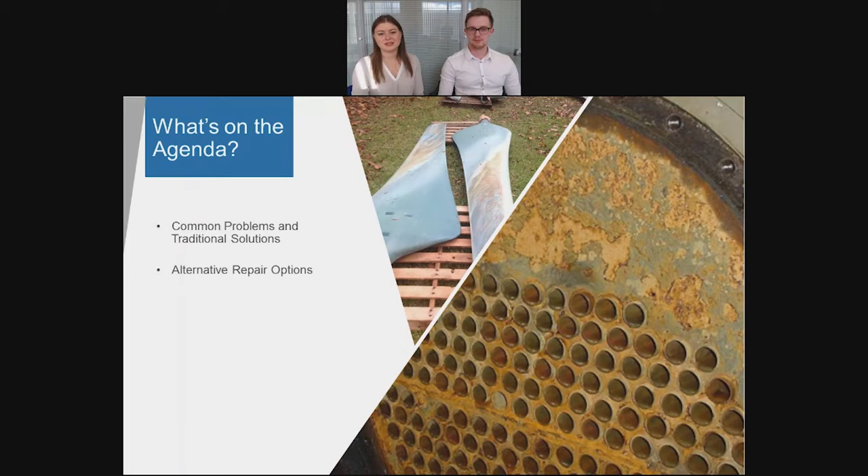And today we are going to talk to you about HVAC maintenance. So we'll start by looking at the problems that industrial and commercial HVAC units face, review alternative repair options, look at methods of how these solutions can be applied, and see some case studies. And you're also welcome to type your questions throughout the webinar, and we will answer them all at the end.

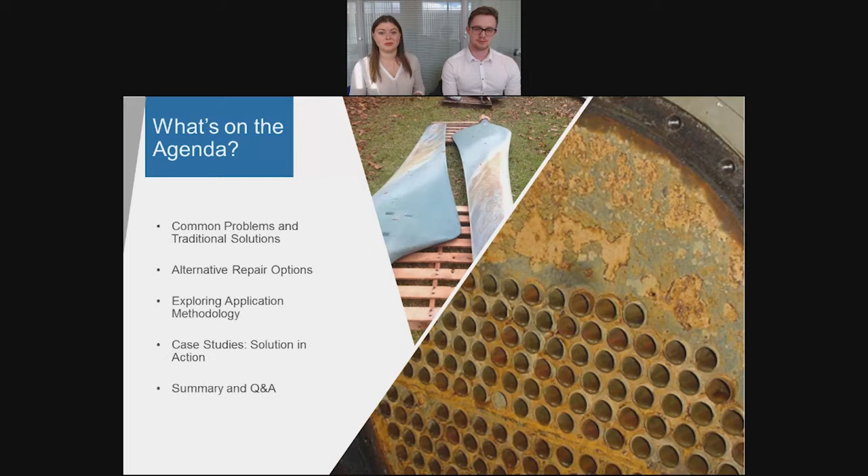So you might be thinking, why is HVAC, or heating, ventilation and air conditioning, such a hot topic currently? As we know, whether it's a commercial or an industrial facility, HVAC systems need to be in operation almost 24/7. Industrial systems use it to change the temperature of certain fluids or gases in order to keep the process going, and commercial units use it to keep a building's occupants either cold or warm. So therefore, it's really important to make sure that these units are in working order.

Disruption shouldn't really be prolonged, as it can normally increase your costs and prevent work from being completed in the first place. So even if an industrial site doesn't have something big like a heat exchanger, there's usually an aircon system or a heating system or something like that involved. More so for the commercial side of things, these units are often out the way. So they'll be up on a roof, in a spare room, somewhere off to the side where they usually get forgotten about. And it's not until the day that they stop working that you remember that you need to have good maintenance routines to make sure that they're up and running all the time.

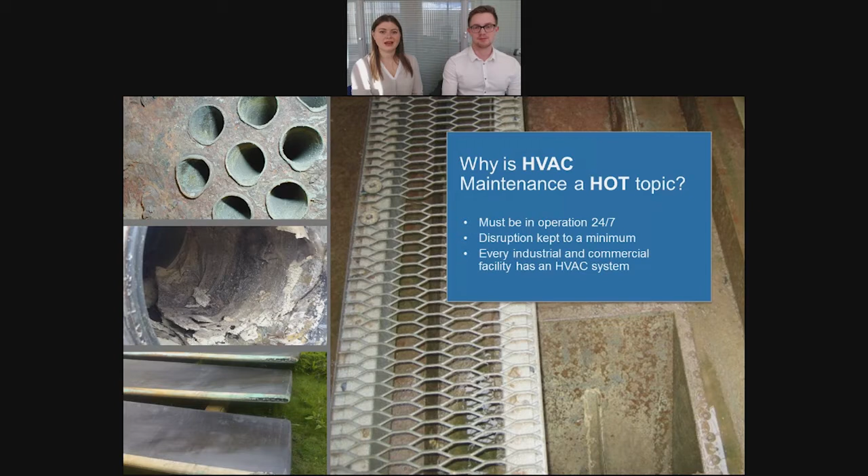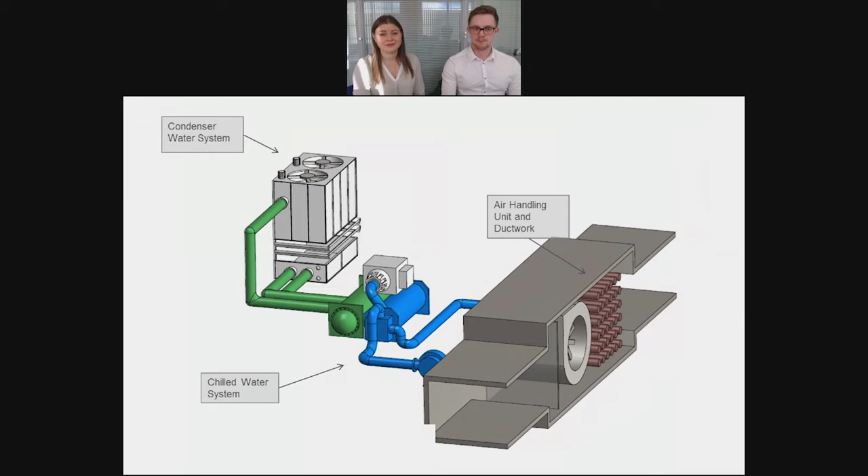So let's look at some problem areas within an HVAC unit. So first we will look at condenser water systems, then chilled water systems, and finally review problem areas within air handling units and ductwork. HVAC is an almost entirely closed loop process, so the whole system needs to be functioning in order for any output to be achieved. The main thing that's really stopping this output from happening in a lot of cases is corrosion. As we all know, corrosion is a massive battle for anybody who owns any type of equipment. And building owners, managers, integrity engineers tend to struggle to maintain the integrity of units such as HVAC.

So to get a corrosion cell, we only need three things. You need an anode, a cathode, and an electrolyte. But unfortunately, in this type of situation, all of these are present within an HVAC system. So to take an example, you can see an example of a tube sheet heat exchanger on your slide at the moment. And they're a classic example of where you get this type of damage. Large surface area of metal in contact with a large volume of liquid makes them susceptible to corrosion. Not only the standard general corrosion, but also bimetallic or galvanic corrosion as well. So if it's not properly treated, effectively the metals gradually self-destruct when they're exposed to these circumstances.

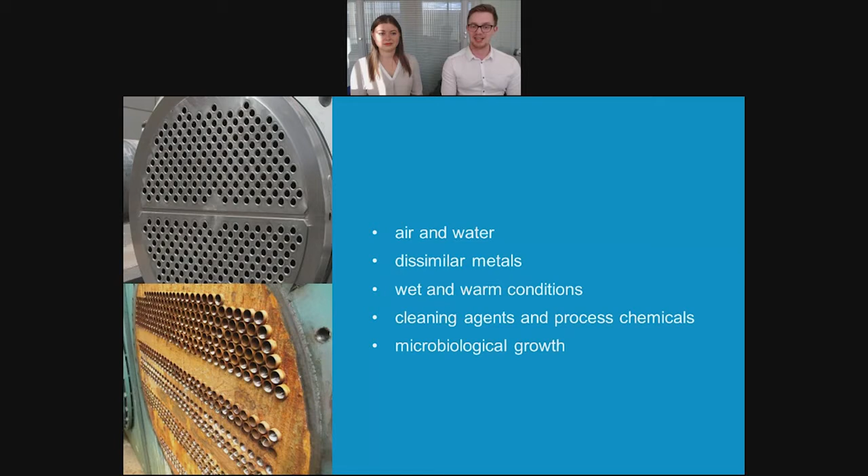Usually in a tube sheet heat exchanger, the tubes are made from copper while the face is made from something like mild steel. And because copper is a more noble material, the steel begins to corrode preferentially, causing a really rapid loss of material. This becomes a problem the longer it goes on. If it's left completely unchecked, the wet and warm conditions inside the HVAC system, combined with any cleaning agents and process chemicals, accelerate the corrosion massively.

So some of the standard solutions you might come across: in a lot of cases, replacement is normally the first port of call. Obviously, this brings you back to your starting point with a brand new bit of equipment. However, it doesn't necessarily last. So you need to ask yourself, have we found and fixed the root cause of this issue? If the answer is going to be no, then you can probably expect history to repeat itself.

Patch repairs and weld overlay are, to put it simply, adding just more metal to the surface, and with these you can encounter a few issues. Either you're not fixing the issue permanently, it could happen again in some cases, or over time you'll need to complete multiple repairs to the same piece of equipment. So it makes sense to choose something which would prevent it from happening again across the entire piece of equipment. You could perhaps choose to use a certain type of paint or sacrificial anodes or something similar, but these either have a limited service life or require constant replacement and maintenance in order for them to be effective in the first place.

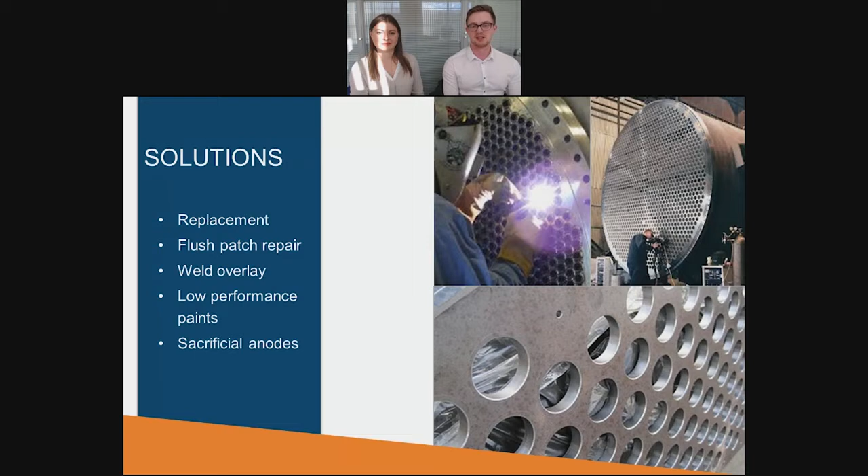So we'll look at the condenser water systems now. Large office buildings, hospitals and schools typically use one or more cooling towers. And unlike the large concrete units we see at power stations, these smaller cooling towers are commonly constructed from galvanized steel. And the combination of air, water, chemicals, and heat in cooling towers creates a severe corrosive environment. And we usually see perforations and severe metal loss on units which have been in service for some time.

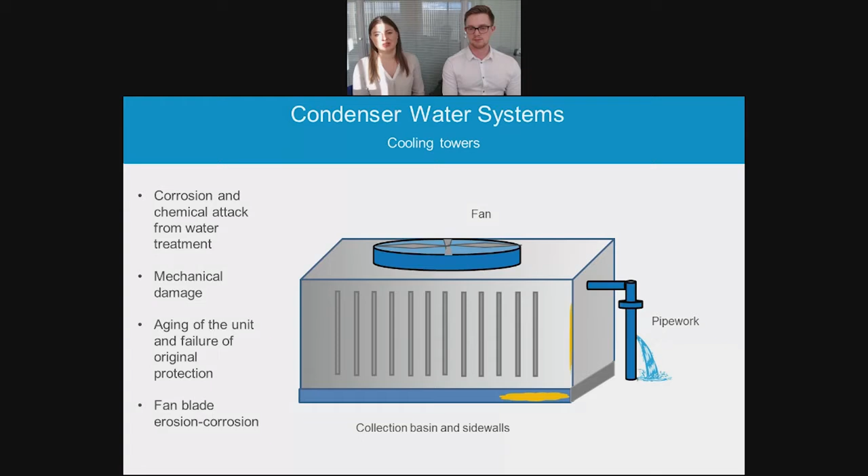So let's look at some of the solutions that we can recommend for these types of problems. So our first case study brings us to a local bank where we are looking at 3 Marley cooling tower cold wells. And this type of system is usually protected by galvanization of the steel. However, the chemicals which were being used to treat the water were so strong, they actually ate away the galvanized

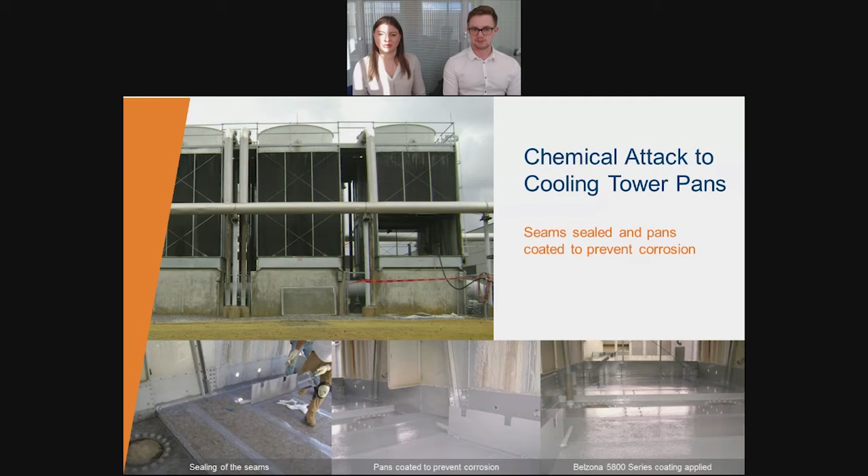sections of the steel. And the exposed area, which was the pans at the base of the unit, which we can clearly see in the pictures here, began to corrode, and they were concerned that a leak would develop. So the decision was made to coat the area and seal the gaps around them. And materials used for this job have excellent adhesion and do not corrode, so non-metallic materials that Belzona offers. So problem solved.

So the next example we're going to look at is an example of a part of the HVAC system which again is forgotten about, but is part of all of them. So pipework. We focused a bit on the towers and the big units so far, but obviously something needs to transport all this water and all this liquid around the system. So as you can see from the picture, the geometry of this leaking pipe made it very, very difficult for them to come up with an effective repair. The engineers who were tasked with making a repair were actually really struggling to find something which was suitable to

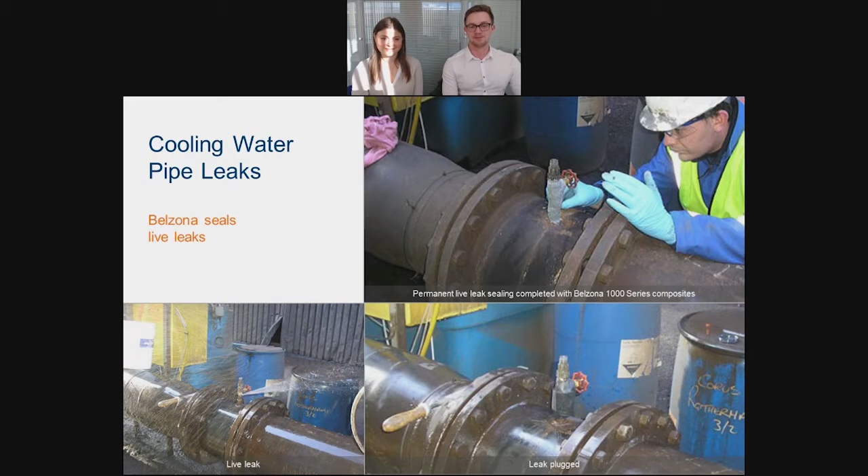In the rest of the system as well, so obviously we have the pipes, we have the bigger units, but the air that's been exhausted out of the system has to go somewhere. So normally you'll find fan blades within the system. On first glance, a fan rotating and forcing air out of the system doesn't seem like it would have that much damage done to it. However, much like their bigger turbine counterparts, the small amounts of moisture in the air can cause really severe erosion to the leading edge of the blades. The blades themselves are designed to a very, very tight specification, so any deviation in this design causes issues such as efficiency loss.

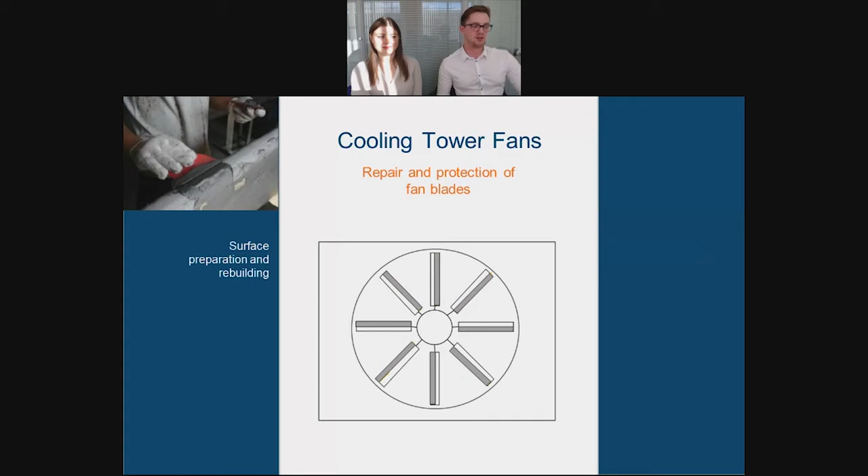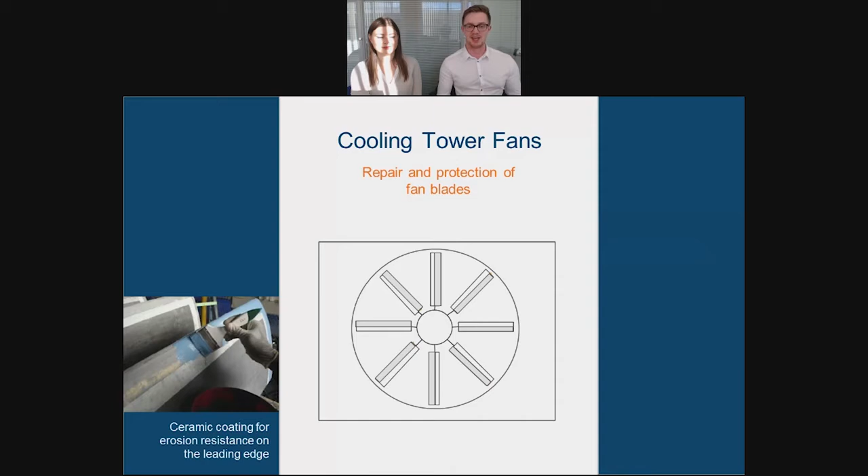The repair method itself is relatively straightforward. So begin with surface preparation and rebuilding using a paste grade. You can then apply a ceramic coating onto the leading edge to prevent that erosive damage from the moisture contained in the air, and then apply a general polymeric coating for protection from corrosion and also chemical attack to the remainder of the blades.

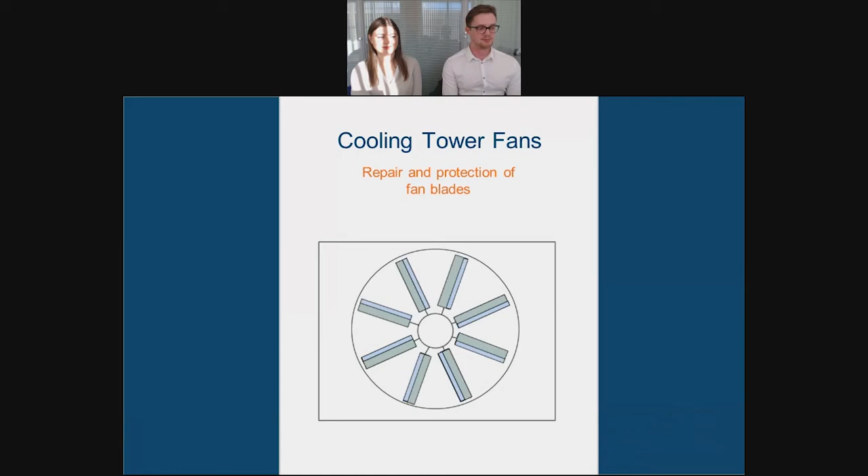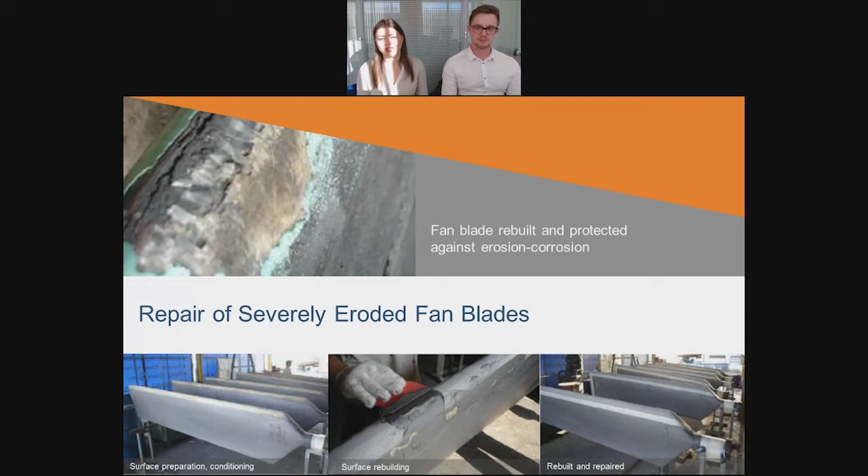So you can see here a clear picture of exactly what happens when this erosion corrosion issue goes unnoticed for a very long time. So we see severe erosion on the FRP fan blade, and in terms of repair, after surface preparation and conditioning, the worn edge of the blade has been rebuilt with the ceramic epoxy that Henry talked about before, which adheres very well to FRP. Combined with the reinforcement tape, it will prevent blade disintegration and strengthen its structure. So it's a great alternative to replacement, and jobs like this can even be carried out in situ.

So the reason for this next repair taking place over in Texas was because the system itself was beginning to lose efficiency, mainly due to the erosion of the blades. The customer was finding that they needed to replace the blades every 5 to 7 years, and because they had 12 towers, you can imagine in each of these towers they have a couple of blades. That's going to get very, very costly for them to constantly replace them.

So using 4 different products from Belzona, including 1111 and some of the ceramic coatings, they rebuilt the blades back to their original specification. The customer actually noted after that they'd saved as much as 80% on their replacement costs. This was down to the minimal amount of material and equipment they needed to do the repair, and also the overall cost of buying new blades in was very high in comparison to the repair that they completed.

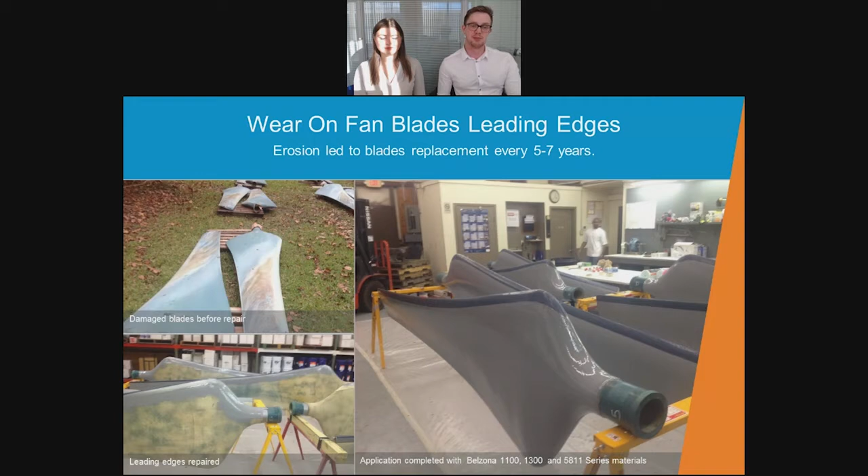So we're going to have a quick look now at the chilled water system section. Chillers and heat exchangers are a vital part of any heating or air conditioning system, and failure can normally be caused by a couple of issues. As we've already mentioned, corrosion leads to wastage and metal loss on the tube sheet face around the coolant tubes, and this can be classed as either general or galvanic corrosion.

And the second one is leakage. This loss of metal, mainly through erosion or corrosion, can cause leakage of this coolant and potentially contamination of the chilled water itself. Again, it drops the efficiency. Normally, a corrosion allowance is designed into the system to accept anticipated levels of metal loss. However, throughout its lifetime, metal losses will gradually occur, and if the corrosion allowance is exceeded and gaps begin to appear, eventually you'll get recirculation, which again drops your efficiency massively.

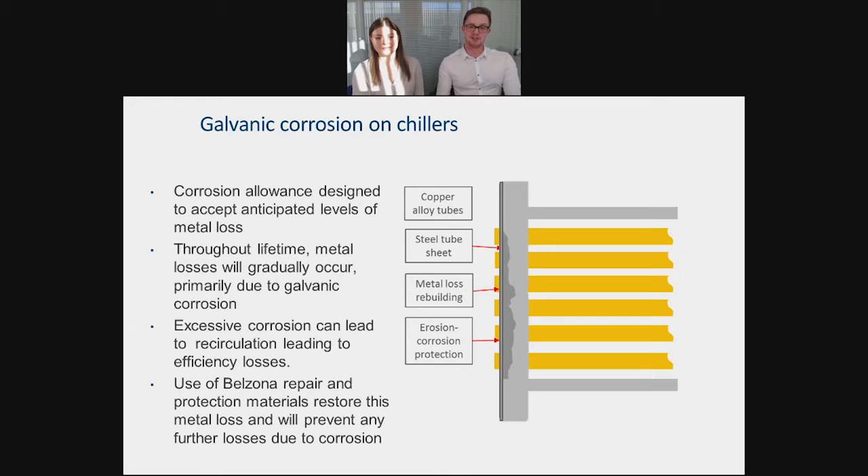So in order to prevent this from happening, there's a way to apply epoxy materials to a tube sheet face in order to stop the corrosion from the start. First, an epoxy paste is used to rebuild any lost metal, and then we use a ceramic-based coating to prevent the damage from reoccurring. If you can prevent that liquid from contacting the surface in the first place, then you can prevent the corrosion from even beginning. So let's look more closely at the process of repairing and protecting tube sheets.

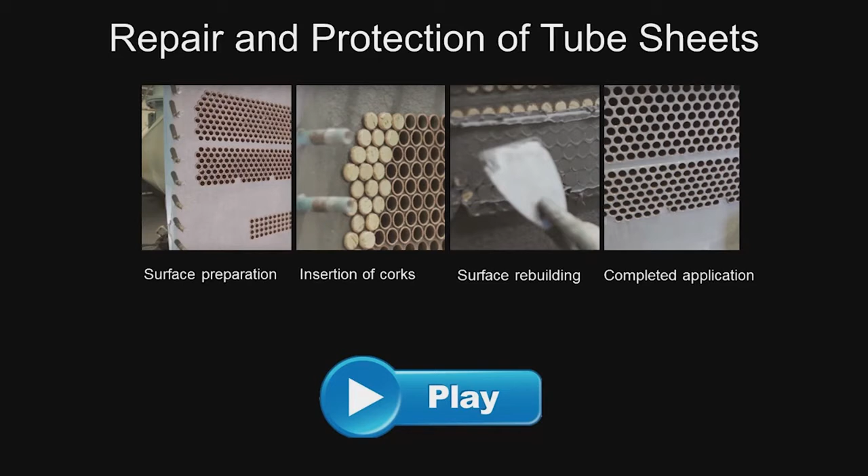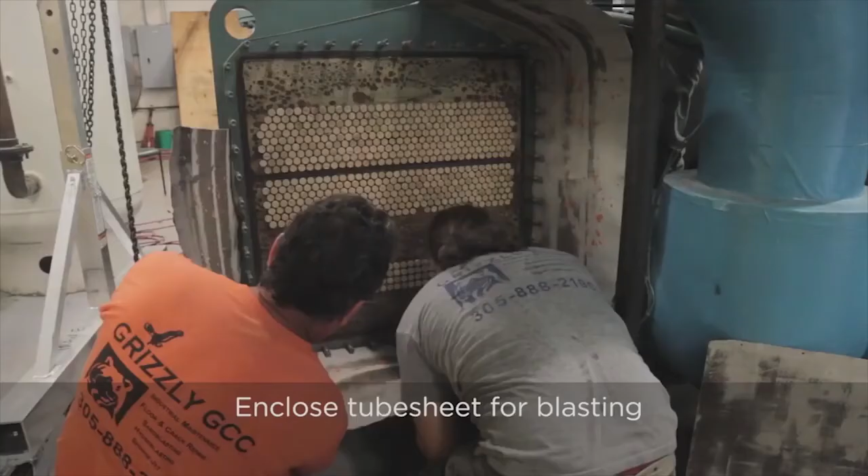Okay, so this is just a quick example of an application we did onto a chiller, a tube sheet application. The first step is always surface preparation. The first thing they're going to do is insert these corks into the tube sheet, and what this does is block up the tubes themselves. The whole reason we do that is because we don't want any of the grit from the grit blasting or any product going down the tubes, because it would block them. And a blocked tube would again reduce the operational efficiency of the system.

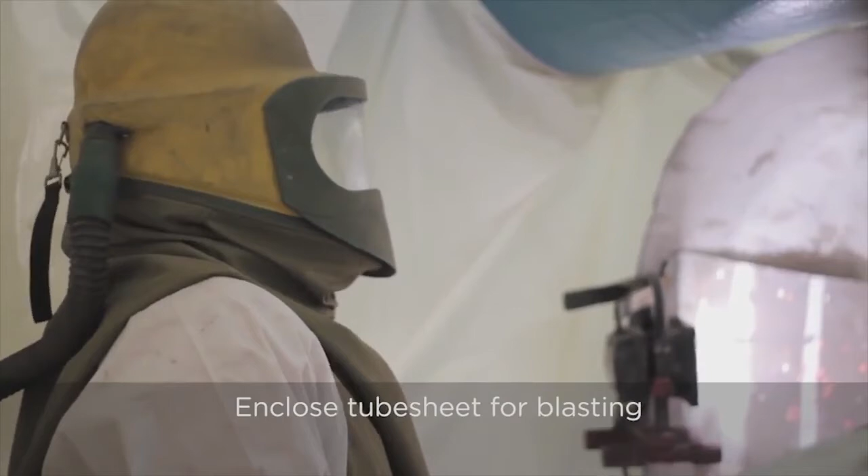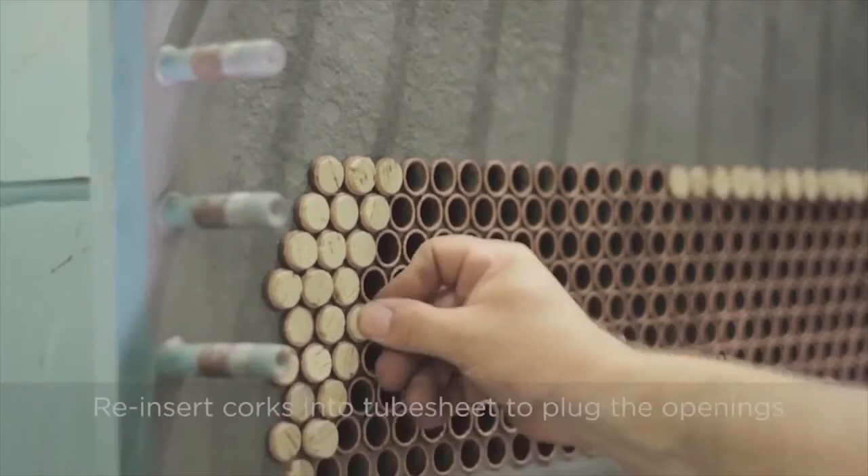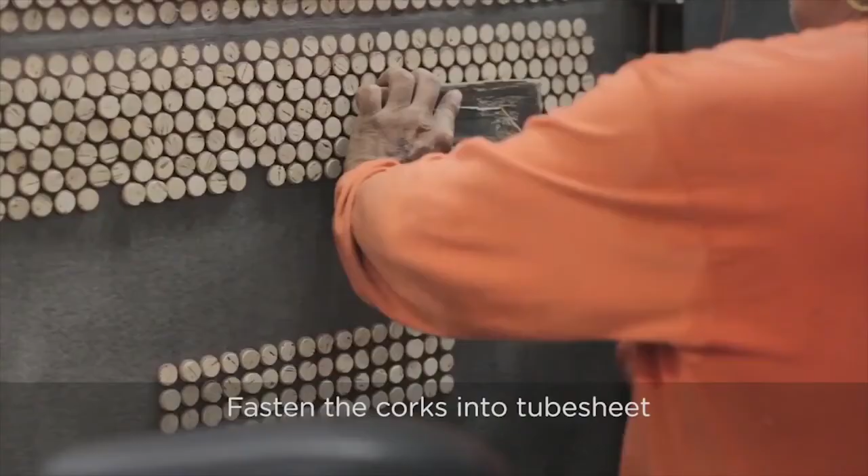So once all your corks are in and everything's enclosed off and ready for blasting, you start with surface preparation. Ideally, grit blasting is the preferred option because it removes all the corrosion, it cleans the surface really well, and we're looking for a 75 micron profile to the surface. Afterwards, remove those corks and replace them, because they would have been slightly damaged from the surface prep process, and refasten the corks back into the tube sheet itself.

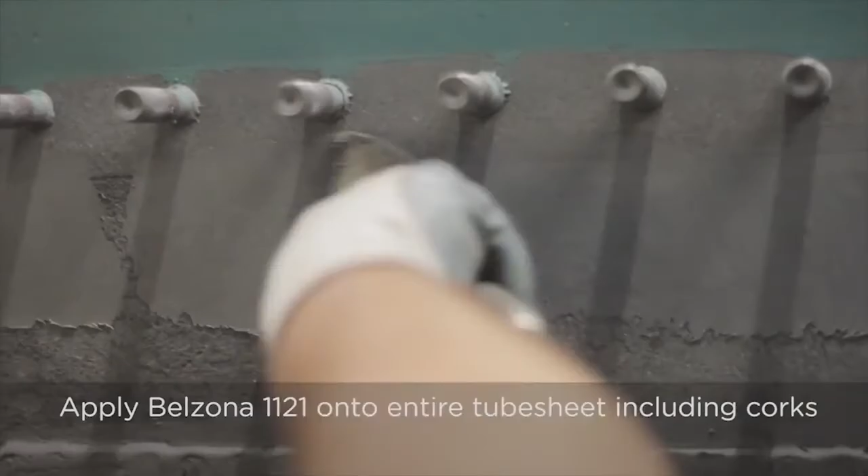In order to get this metal back up to a surface where we can apply a coating, you then mix up the epoxy paste grade, and then he's just going to use a spatula and paste that onto the surface after the surface prep to rebuild it and get a nice flush finish to the application.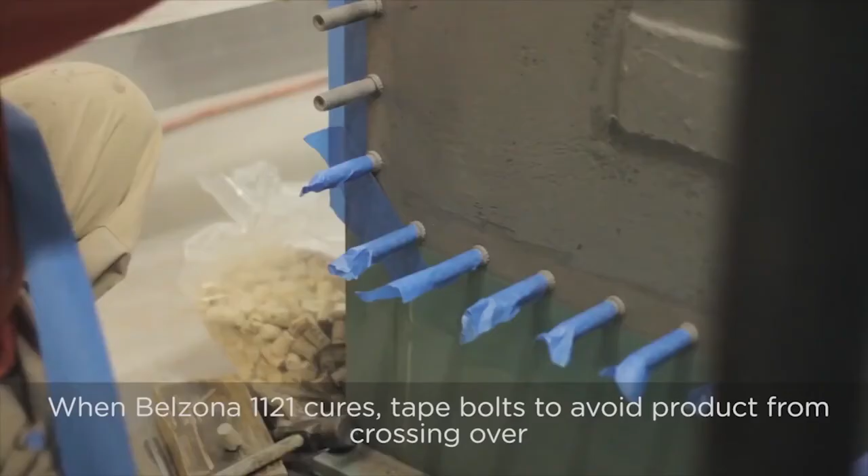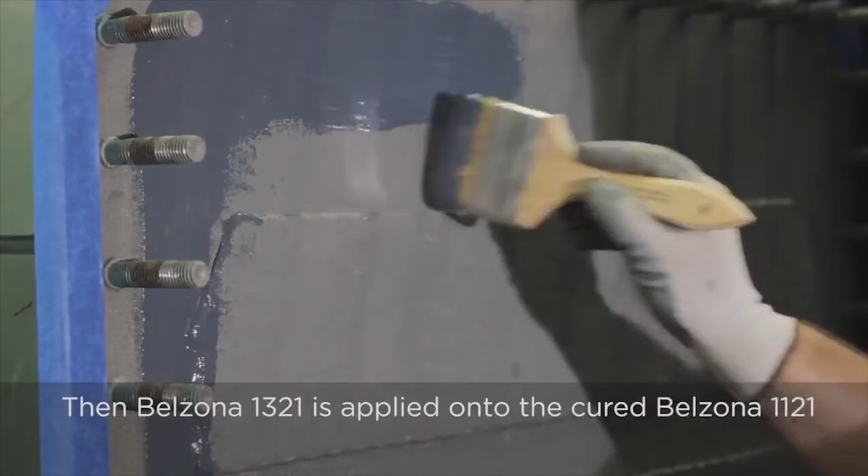After the Belzona paste grade is cured, you then tape all of the corks in order to avoid the product going down the tubes, replace them if necessary, and then you can apply the Belzona 1321 or other ceramic-based coating directly on top of the Belzona paste grade, as long as you're still within that overcoating window. They used Belzona 1121 in this example because it had an extended working life and also an extended overcoating window, which meant they had plenty of time to apply this material on top.

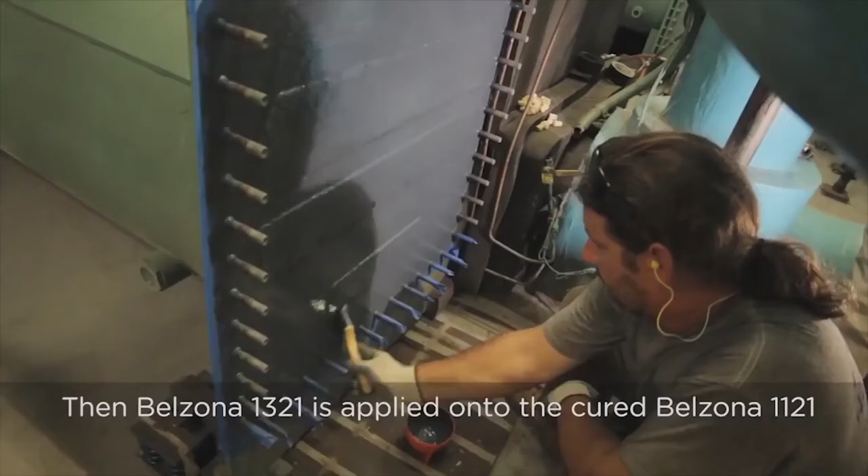Once both of them have cured, you can then remove the corks finally from the system and dress back the coating to give you a nice flush finish where you've prevented the liquid from contacting the surface, and you've also isolated the tubes from the tube sheet face, which means you've prevented any type of corrosion from happening in the future.

Great, thank you, Henry.

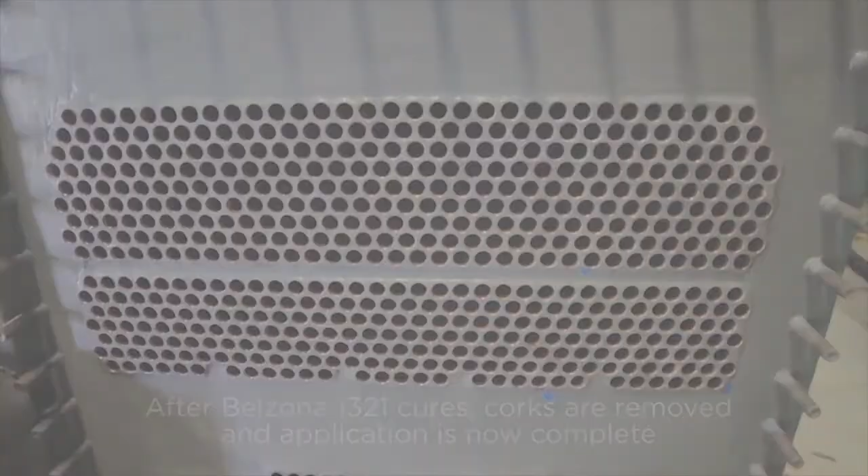We do also tend to get a lot of questions about how you can remove the corks. So in terms of removing the corks, you can do it manually using a corkscrew. It takes a bit of time and it's quite labor intensive, but it is the most accurate way. Or if you can get to the other end of one of the tubes, you can blow compressed air down the tube and it will pop the cork out on the other side. That's the easiest way I've found to remove them myself.

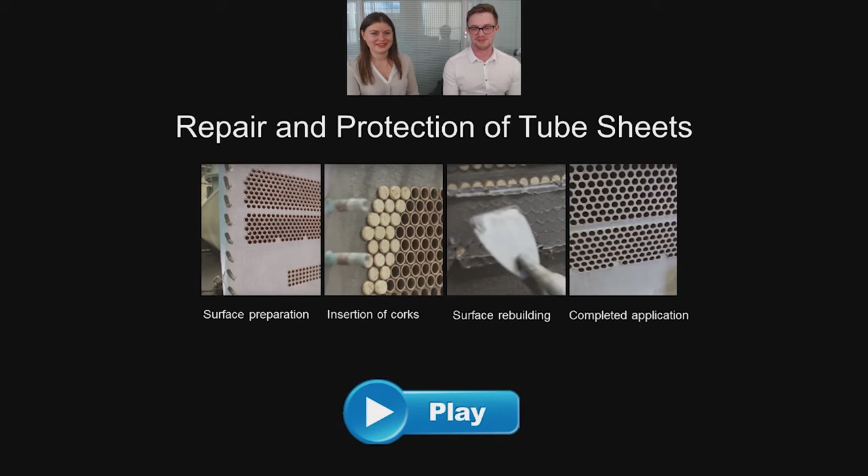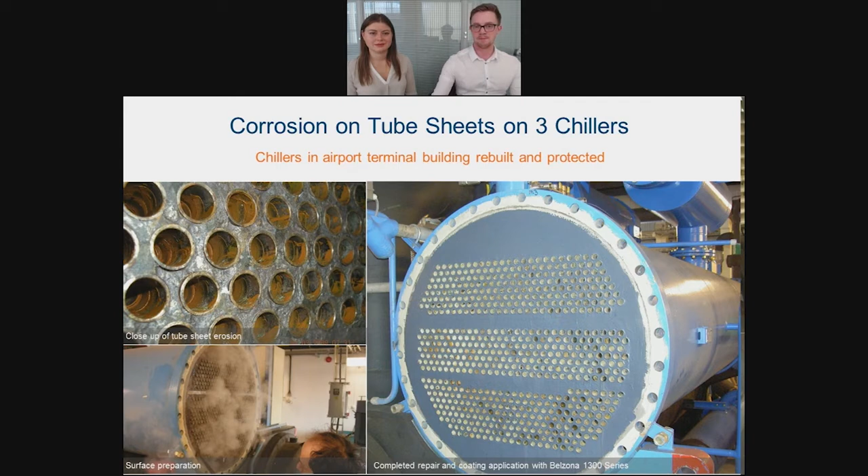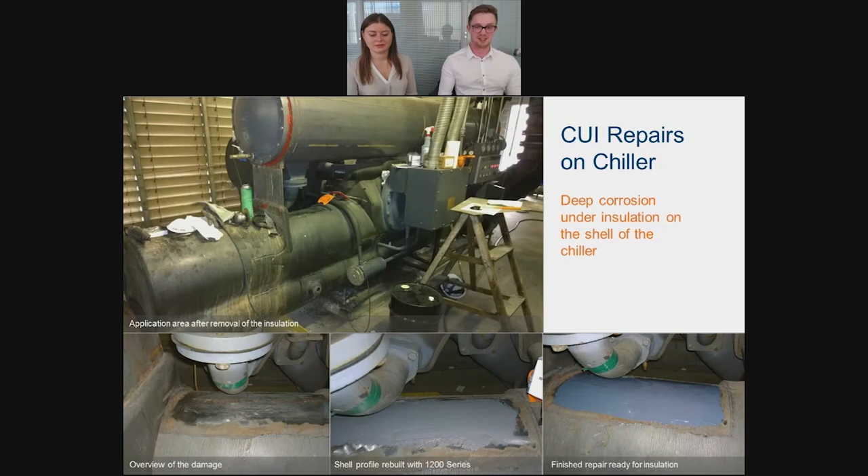So now if we move on to the final section, the air handling system suffers many similar problems as the pipework. Internal corrosion due to water condensation, higher temperatures as this handles a lot of the exhaust air from the HVAC system, aggressive cleaning chemicals contained within the condensate, and even sometimes microbiological growth within the system.

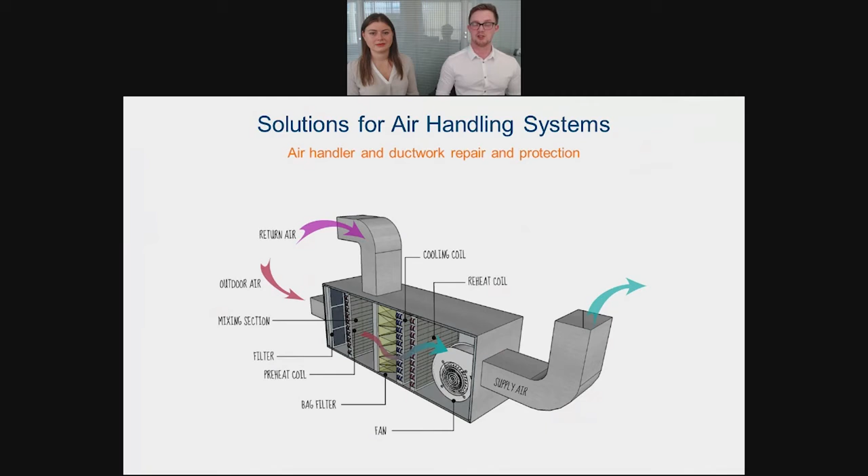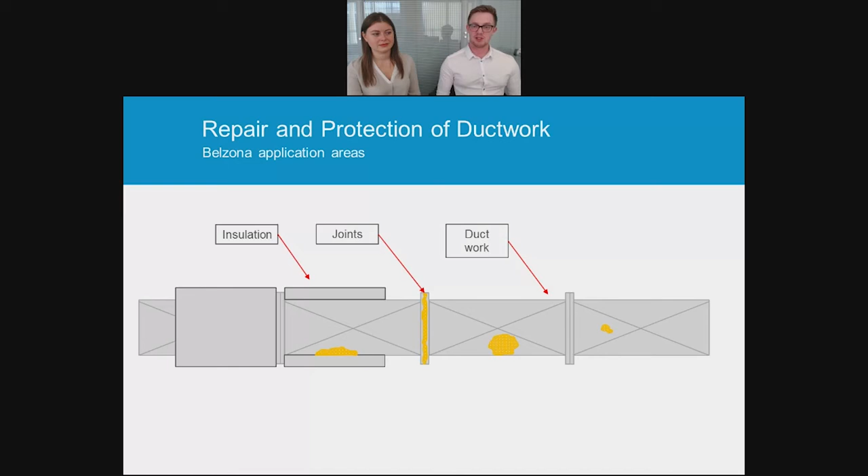The ductwork itself is similar to the pipework for carrying the water, but it's more for the air side of things, and it's the lifeblood of the air-based system. So just like the pipework, problems come with the design. Normally there are a lot of junctions, seams, seals, joints, and other crazy geometries, and this gives more areas susceptible to leaks. The failure of the joints and seams can also allow critical ingress of water and disruption of the airflow, and it affects the cooling and heating process.

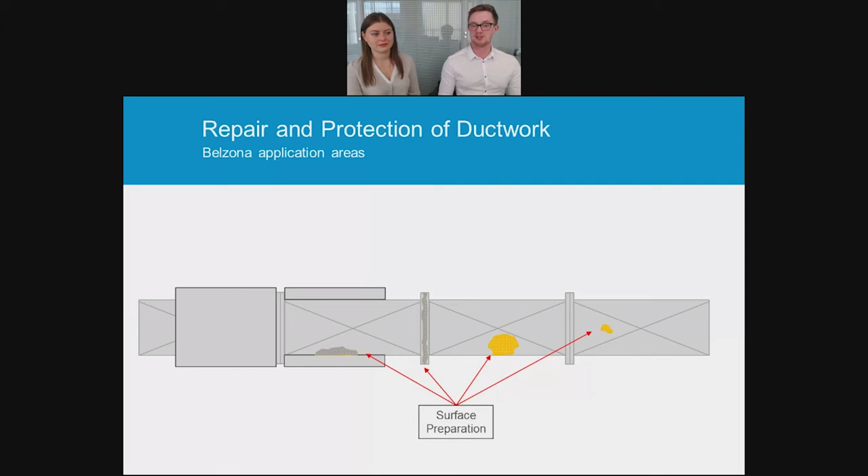Belzona's flexible repair materials can restore these joints and seams as a long-lasting solution. Sealing at the interface where the roof and the ductwork meet can also be achieved with these same Belzona flexible membranes, and the complex contours themselves are quite difficult to coat. So a system which can cope with being applied at various angles is always a positive. Again, these Belzona materials can be used for protecting both the internal and external of the ductwork, as well as T-pieces, elbows, and other difficult to coat areas.

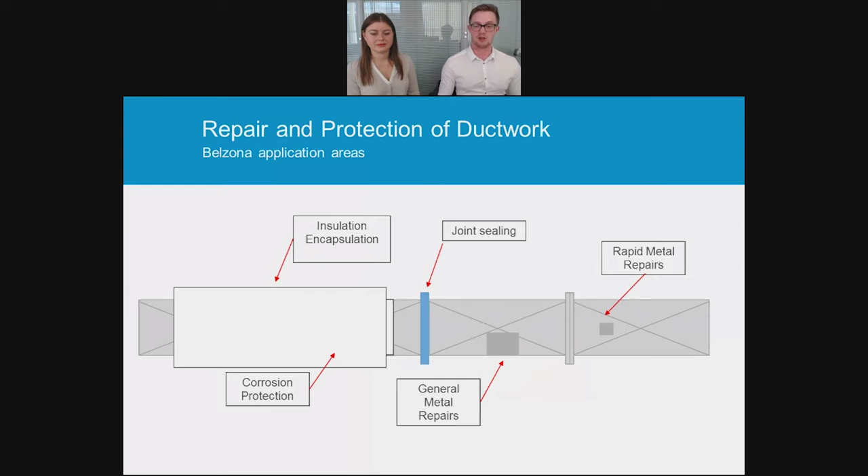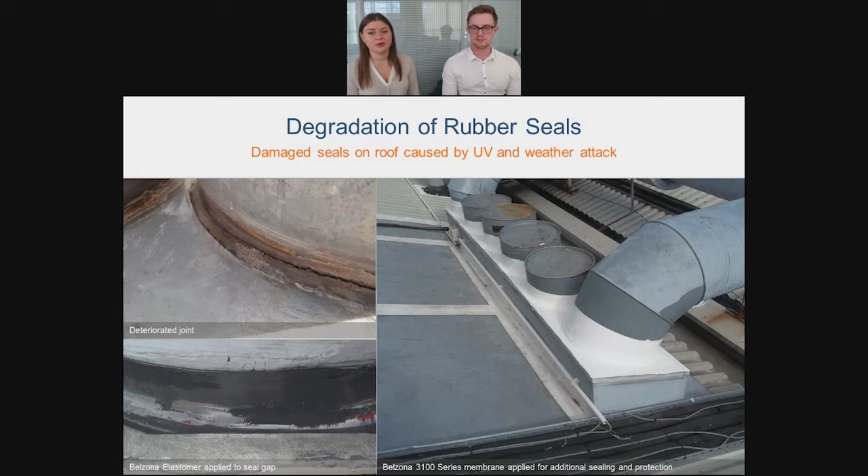So as Henry was talking about the versatility and flexibility of Belzona materials, let's look at these features in action. So here, the effect of weather and UV caused rubber seals around ductwork penetrations to degrade, allowing rainwater to leak directly into the production area, creating disruption in production and, of course, safety issues. So the joints were resealed with an elastomer before applying a fully reinforced flexible membrane system. And the application was completed in 2 days without disrupting production, giving a long-term water and weather-resistant solution.

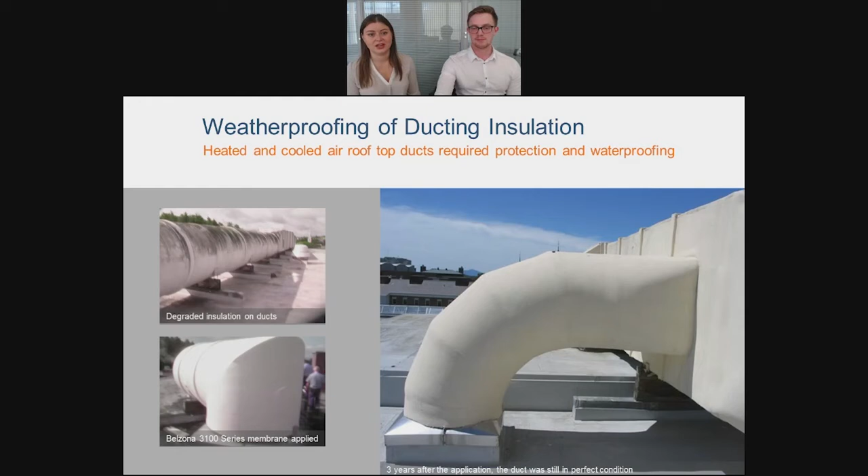Thankfully, Belzona came up with a better solution. Due to its membrane being microporous, there was no need to remove the insulation, and this membrane could be applied on top of the existing system and is still in excellent condition after 3 years in service.

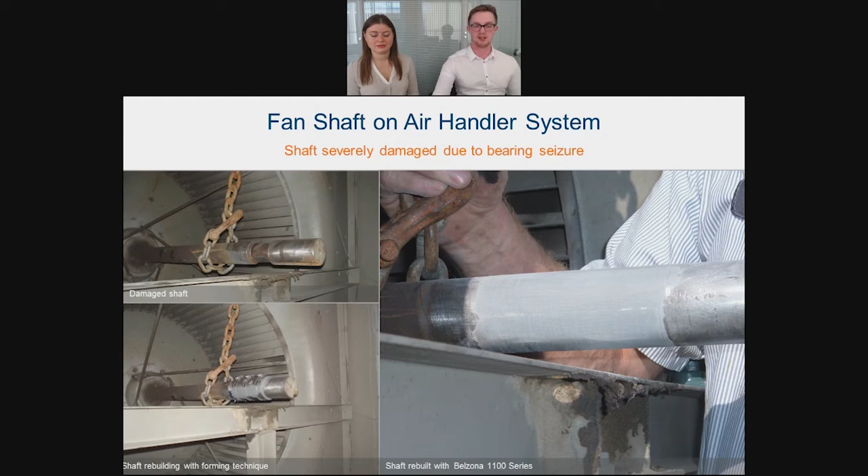They used Belzona 1111 and a former, as you can see in the bottom left picture, to give them a good solid finish and a good clean finish. So when they removed it, there's minimal dressing down and they can put the shaft straight back into service as soon as it had cured. There was no need to machine it or grind it afterwards, and there's nothing additional that needs to be added to the system in order for it to be put back into service the following morning.

So just to recap, we wanted to summarize some of the benefits of using non-metallic and other Belzona materials for HVAC repairs and protection. So the cold curing and solvent-free nature of these materials not only makes them safer to use, but aids the application as there is no shrinkage or distortion of the material during curing. And all cure with a wide application window and no external heat or specialist tools required.

And in terms of performance, all the materials we've shown exhibit very, very good adhesion to a wide variety of substrates. And there's a lot of products which can cope with varying levels of chemical or mechanical attack. Obviously, we don't have time to go through every single one of them at the moment. And these products are also designed to provide a long-term solution as opposed to just a quick fix. So you saw the example of the heat exchanger that lasted for 35 years. That's a considerably long time if you take into account all the different replacements and all the different weld jobs that they might have had to do should they have not used the Belzona system.

Another question from Ottavio. What is the temperature work range for 3100 series? So 3100 series are designed for environmental conditions. So outdoor temperatures, obviously in the UK, it's pretty much freezing most of the year round. Probably about 10 degrees is our average. Middle East, Far East, some places in the US, South America, they'll get a lot hotter, obviously. So I'd say probably 60 degrees centigrade is our top level.

But the products themselves are designed so they can go ever so slightly higher. So if it occasionally sees a jump to 70 or so, you might find that the product will be okay, but that can only be for a short time. So I'd say ambient, like global temperatures, is what the product's specifically designed for, not like an in-service heated environment.